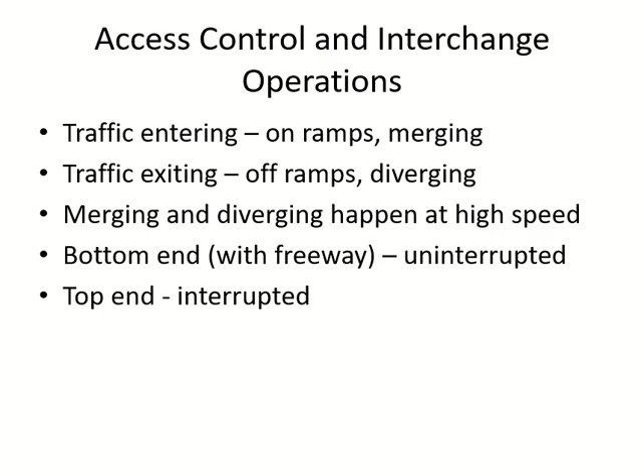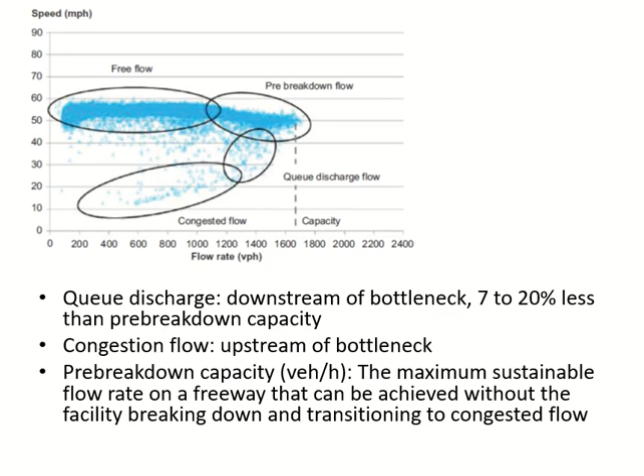Okay, we discussed the ramps and the traffic movement on the ramps, and what are the different types of traffic flows which happen on these facilities without intersections. So there are two main uninterrupted flow facilities. There's a third one as well, which we will discuss in the traffic engineering course, but in this course we are talking about the two main uninterrupted flow facilities, which are freeways and multi-lane highways.

What is a freeway? Freeway has multiple lanes, it has a median, and it is without intersections. Freeway has multiple lanes with a median, without intersections. That is called a freeway.

Because it is without intersections, we use a terminology for highways which are without intersections, which is full control of access. Access means entry to the highway. So when there is no intersection, the entry to the highway is controlled, meaning restricted. Control here means restricted.

The other uninterrupted flow facility is multi-lane highway. This one also has multiple lanes in each direction. It may or may not have a median, and it may or may not have intersections as well. This one has intersections, but the spacing between the intersections is more than 2 miles. So multi-lane highway has multiple lanes in each direction, and it may or may not have a median.

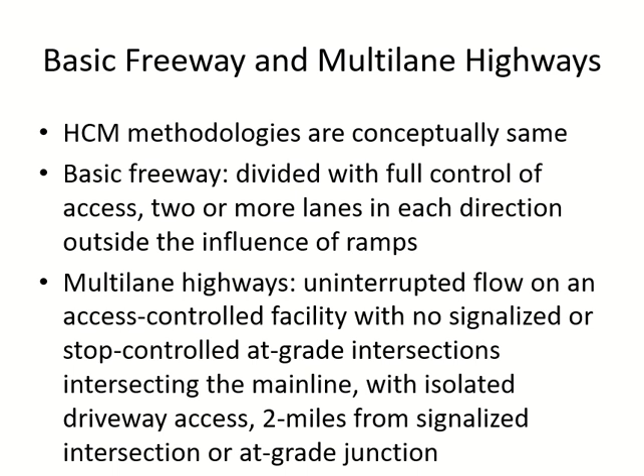Let us start with some definitions. The first definition is for capacity. We have used this term earlier as well, but here we are using the definition given by Highway Capacity Manual. So in this analysis, we are following the procedure given in Highway Capacity Manual, which gives you the procedure to calculate capacity and other things for uninterrupted and interrupted flow facilities. According to Highway Capacity Manual, the official definition of capacity is what you see on the screen.

It's a maximum sustained 15-minute flow rate. Remember, flow rate we discussed earlier - when you take flow and convert it to 1 hour, that is flow rate. So it is 15 minutes but converted to 1 hour, that's why they are calling it sustained flow rate. And it is expressed in passenger cars per hour per lane.

The capacity is defined for a uniform segment. Uniform means the part of the highway for which you are defining the capacity - within this part, the highway design is not changing. So if you define the capacity from point A to point B, then between point A and B, nothing changes in the design of the highway - number of lanes, gradient, median, shoulder, lane width, nothing changes, it remains the same. When this happens, we call it the uniform freeway segment or uniform highway segment.

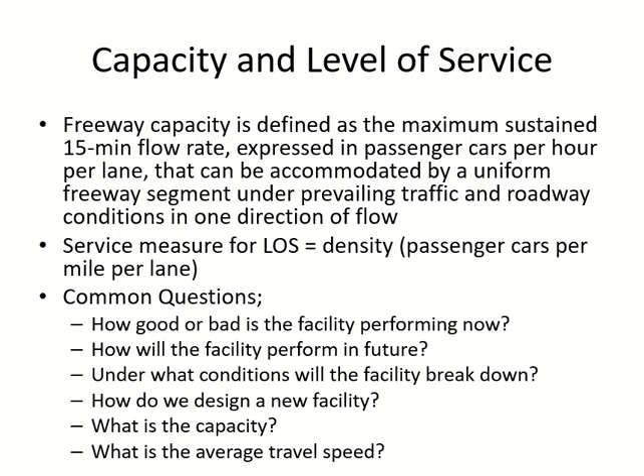So how do you know when it will break down? You should know the capacity. When you go beyond the capacity, the facility will break down. So capacity is important, and for the new facility you will decide the capacity. The most important parameter for the traffic engineer as well as the driver is the average travel speed on the highway. These are some of the basic questions we try to answer through our analysis, and you will see it being done in this chapter.

Why is it unstable? Because at E you are at capacity, so you don't have any extra spacing. If you want to change lanes, the flow will become unstable because of you—other vehicles will stop to give you the chance to change lanes. Or if you have a problem with your car and stop, everybody has to stop behind you because they don't have any space to go to the other lane. That's why the E stage is unstable, but E basically means capacity.

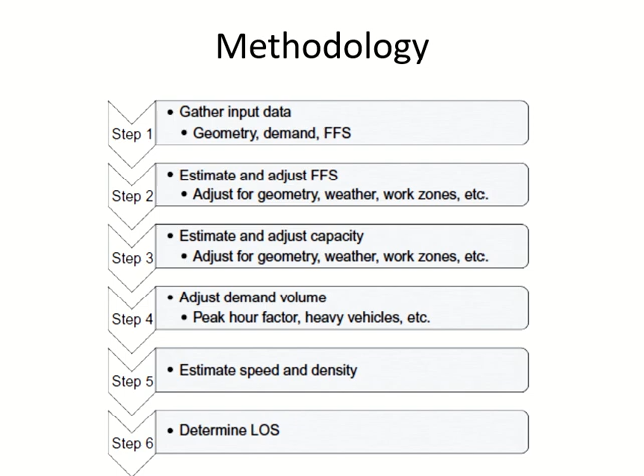So whatever you are doing starts from step 1 onwards. For example, if you are doing it on your own, you have to find out the field conditions and the field data. You should gather data about lane width, shoulder width, number of lanes, and other things shown in this table, which gives the ideal values of these parameters.

So we talked about lane width. What is the ideal value of lane width? 12 feet. Lateral clearance: on the right hand side, the ideal lateral clearance is 6 feet. What is lateral clearance? The distance between the lane and any roadside object. The roadside object could be a wall, a guardrail, a pole, anything - any physical object on the side of the road.

So on the right hand side, the distance between the lane and the roadside object is 6 feet as the ideal. It could be more, it could be less, but the ideal is 6 feet. On the median side, which is the left hand side, it is 2 feet.

Now keep one thing in mind: when we say lateral clearance, we are measuring from the lane. So after the lane, you may have a shoulder, and the shoulder is part of lateral clearance. So shoulder is 3 feet, and after that you have a guardrail, so your lateral clearance is 3 feet. If your shoulder is 3 feet, then you have some empty space, then a guardrail, so your lateral clearance will be shoulder plus empty space.

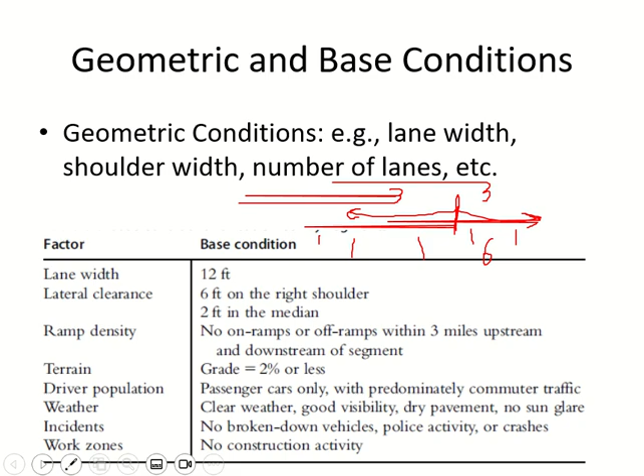One of the very important parameters for the analysis is free flow speed. We know free flow condition means very low traffic, right? So the best way to find out free flow speed is through observation - you go to the highway and actually take speed samples to get the free flow speed. You go to the highway in low flow conditions when the flow is very low, take samples, and do the mean, and this will give you the free flow speed. This is the best way to do it.

Any one of you remember what is the difference between freeways and multi-lane highways? I just told you today. What is the difference between freeways and multi-lane highways? Anybody? No one? Okay, I can move forward, no problem.

If you are going to measure the free flow speed on the highway itself, the flow should be less than 1000 passenger cars per hour per lane. This is if you don't want to use the equations, but if you use the equations, let's see the parameters. We need the base free flow speed. For freeways, the base free flow speed is 75.4 miles per hour - it is considered the highest for the design. That is 75.4 for the freeways. For multi-lane highways, it can change.

Then we have the factor for lane width. In both equations you can see these two things: base free flow speed and the factor for lane width. There's a table which gives this factor - it gives you FLW, which you can use in any of these equations.

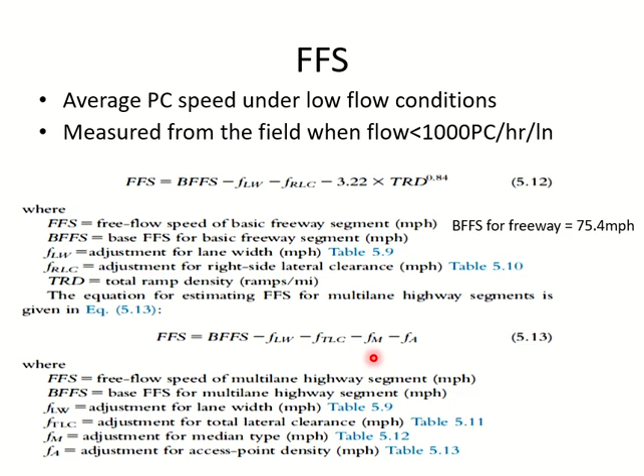One is for median type, the other is for access point density. Median types are 3: undivided, two-way left turn lane, and divided. Undivided means without median, divided means with median. And what is the two-way left turn lane?

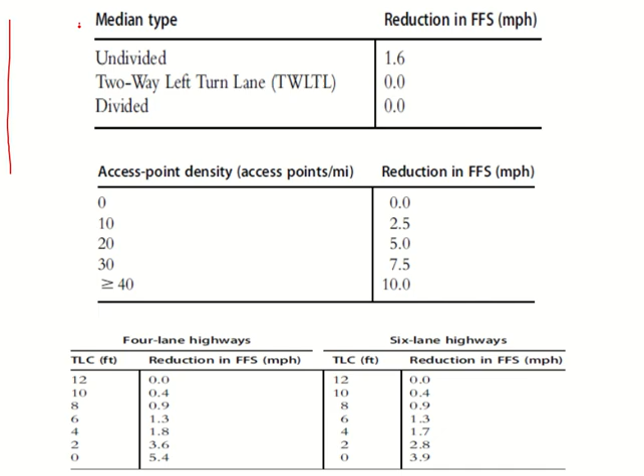Let me try to make it here. So you have a highway. In the middle of the highway, you have a lane. Maybe there are 2 lanes here and 2 lanes on the other side, and there is an extra third lane. So you have total 5 lanes in this case. In this example, 5 lanes, but you can imagine it can be 3 lanes in each direction and 1 extra lane - a two-way left turn lane in the middle.

That extra lane is for left turning. So let's say there is a turning here. If I want to take the turn, I'll come in this lane and wait. I will wait as long as this side is free. When this side is free, I will take the turn. And the guy from the other direction can do the same - he can also wait here till this side is free, and when free, he will take the turn. So this is called the two-way left turn lane.

For left turning vehicles who can come from any direction, they will wait for their turn to make the left turn without disturbing the traffic. So this is the function of the two-way left turn lane, and you can see the factor for two-way left turn lane is same as divided, because this is dividing the two directions as well - the people going straight will not go in this left turn lane.

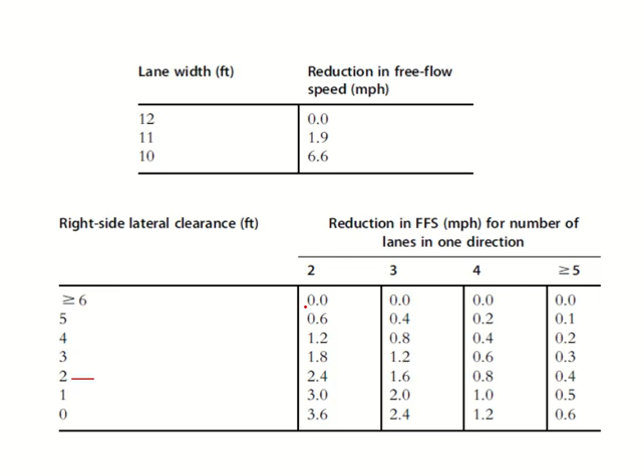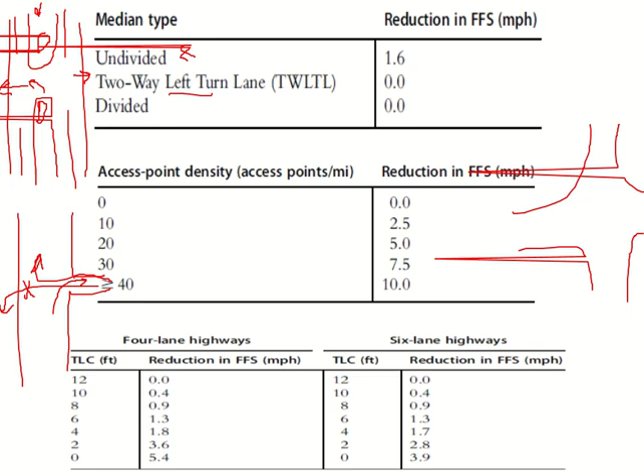Then factor for lateral clearance, our lateral clearance is 2 feet only, and we have 4 lane freeway, so 2 lanes in each direction - 2 feet clearance and 2 lanes each direction gives 2.4. And TRD is not given directly - you have 16 ramps in 6 miles, so TRD will be 16 over 6. So how much is the free flow speed?

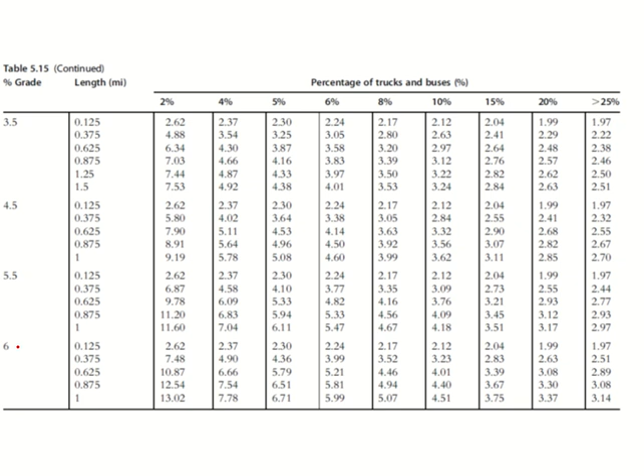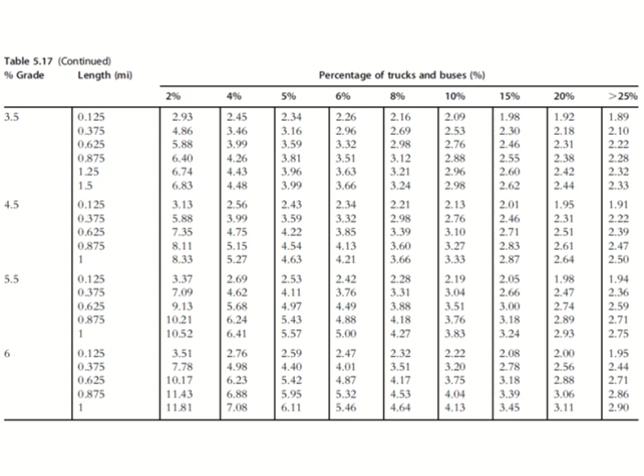Now, this is the continuation of the same table. This is up to 2.5%, then after 2.5%, this is the part. This is another table for grade, and it also has two parts, and this is another table for grade, also has two parts. So you will see 6 slides, and these 6 slides have 3 tables in them. All of them are for the same condition, grade. What is the difference between them? You can see the difference at the top here.

Heavy vehicles are divided into two types, SUT and TT. SUT means single unit trucks, and TT means trailer trucks. Single unit trucks are small trucks, the 6-wheelers we see. The ones on which you get furniture from, not Extra, from what, IKEA or something.

Those trucks, which normally take deliveries for stores and so on, are called single unit trucks. And then you may have seen bigger trucks in the port area or near the causeway, very big trucks. They have trailers in them, and sometimes they are bringing cars, sometimes they are bringing steel and so on and so forth. So those big trucks are called trailer trucks.

So if the small trucks are 30% and the big trucks are 70%, you will use this table. If both of them are in equal amount, 50-50, you will use this table. And if small ones are 70% and the big ones are 30%, you will use this table. So for grade, we have 3 tables depending upon the percentage of heavy vehicles within them. So this is 30 and 70 within the heavy vehicles. The heavy vehicles may be 6%, so within that 6%, what is the distribution of single unit and trailer trucks?

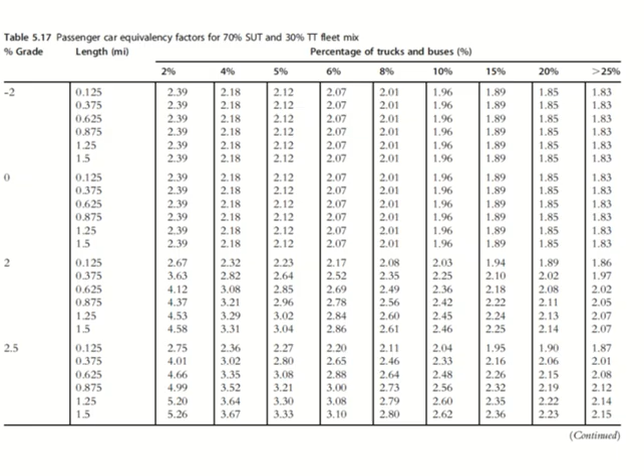So let us do one very quick small example. We have directional volume 3100, so this is my V, normally in vehicles per hour. Then we have to find out the flow rate in passenger cars per hour per lane. It's a 6-lane freeway, so the number of lanes in one direction is 3.

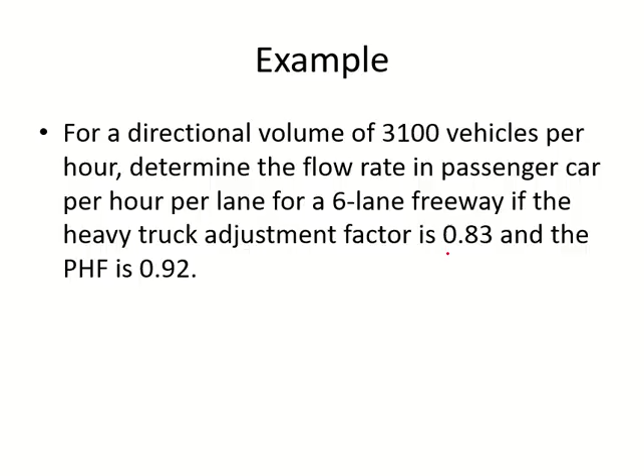Peak hour factor is 0.92 and the heavy vehicle adjustment factor is given, we don't have to calculate, they already did it for us. So FHV is 0.83 and peak hour factor is 0.92. So my VP will be 3100 divided by all these things. So how much is that?

Yes, how much is Vp? Yes, how much is this?

Okay, so this is in passenger cars per hour per lane, and this is flow rate now. So this will not be called volume, it will be called flow rate.

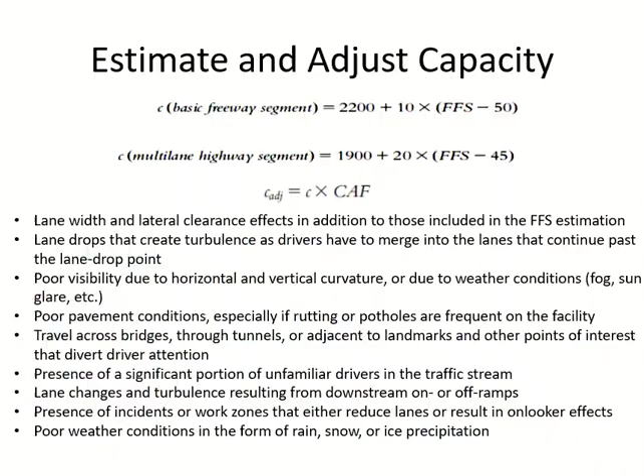And then once you have found the speed from here, the density will be calculated as flow rate upon speed. So either the speed is the first one or the second one. So you find out density, and if you know the density, you already have the ranges of density for level of service, these ones.

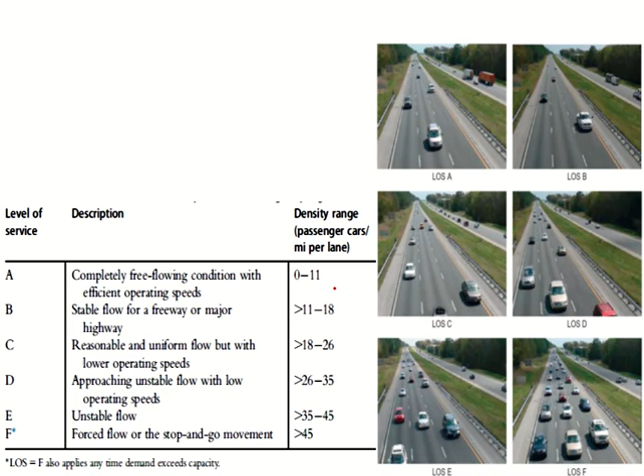Okay, so you find out free flow speed, then you find out VP, then you find out breakpoint, compare, and I already showed you the equation for capacity as well. Then you will see the condition. Based on condition, you will calculate the speed, then the density, then you go back to the table of level of service. It will give you this density belongs to which level of service. So this is the whole procedure.

Okay, but let's say your free flow speed is 60. So how to use the curve?

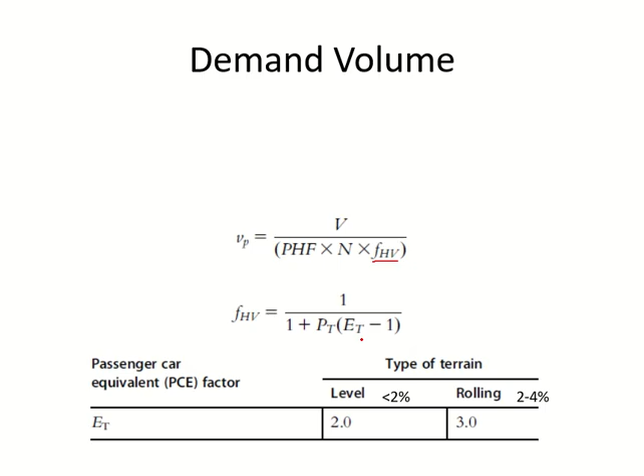If I go to the equation of Vp, I need the FHV, so I need percentage of trucks and the equivalency factor for the trucks. Percentage of trucks is given, 6% trucks, then for the gradient 2.5% gradient, 1.25 mile length, and 30-70 distribution of small trucks and big trucks, single unit trucks and trailer trucks. So FHV will be 1 divided by 1 plus 6% trucks.

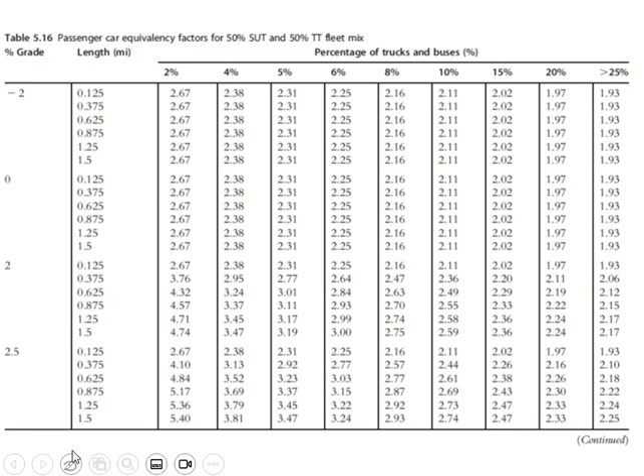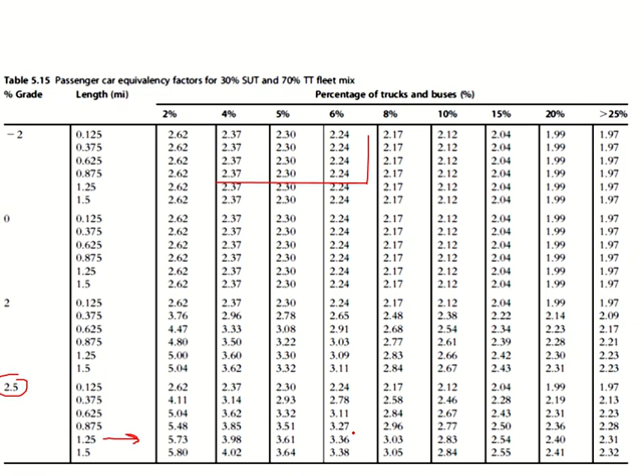Now I need the equivalency factor. 30% single unit and 70% big one, so this one. The gradient is 2.5%, so I'm here. The length was 1.25 mile. So 6% trucks is here, 1.25 is here, so my factor is 3.36. So 3.36 minus 1, this will give me the FHV factor.

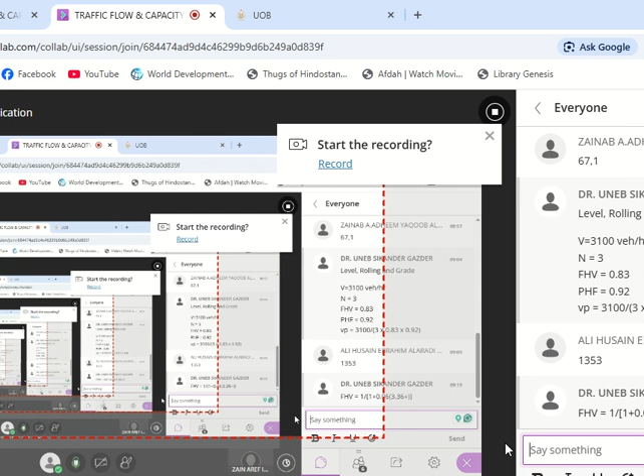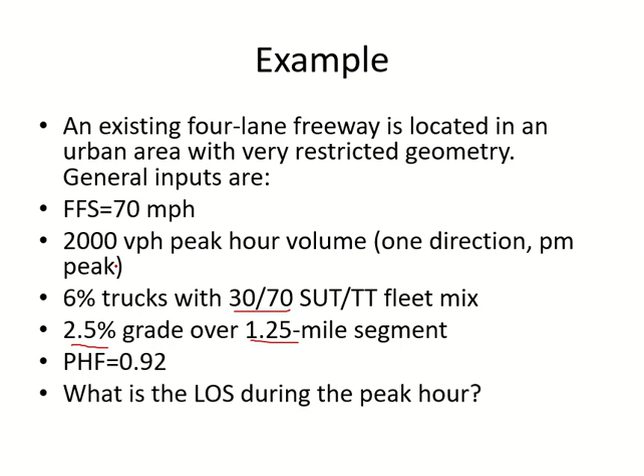Then after you find out FHV, your Vp will be the volume, which is 2000 here, divided by peak hour factor 0.92, number of lanes in one direction. So 4 lane means 2 lanes in one direction, multiply by the FHV factor. This will give you the Vp.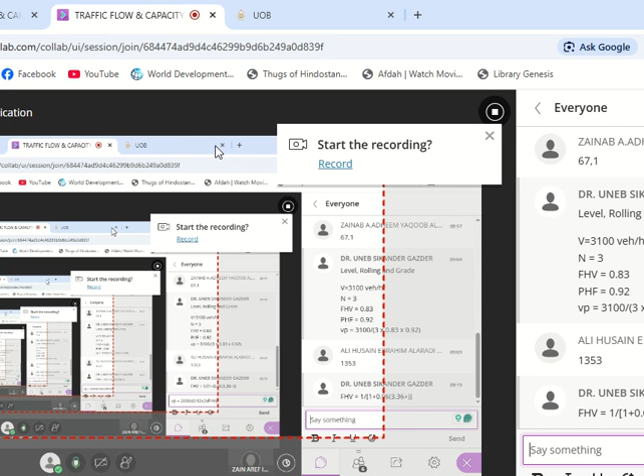After Vp, now you can directly use the graph. So if you tell me the Vp, then we can proceed to the graph. For the rest I will do the manual attendance, so don't worry. So what is the value of Vp here?

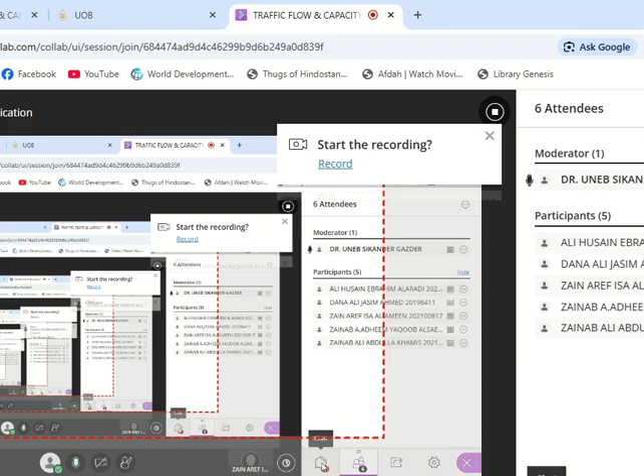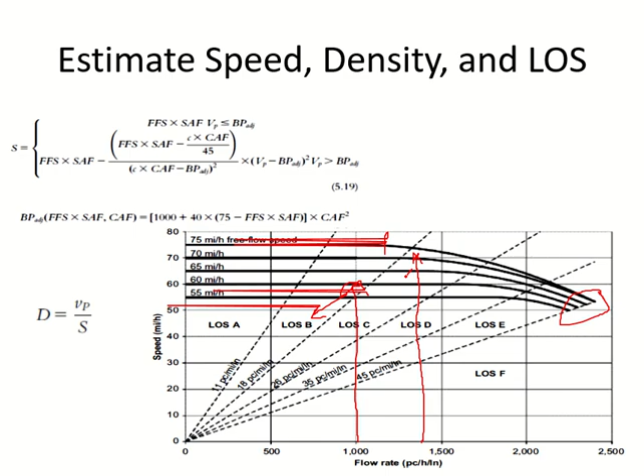So if I go to the graph, I have 70 miles per hour, so this one, and 1300 something is somewhere here, I cannot be precise, it's somewhere here. So I'm here, so my level of service is C.

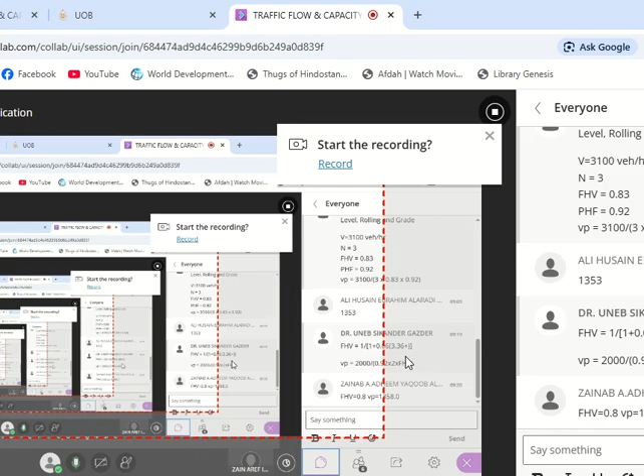So in this case I can directly use the graph because my free flow speed matches with the curve which is given. And again I explained to you the full procedure, and I already told you that in traffic course you will take it in more detail. So we are just using the direct process here, because so that we can move on to the new topics of this course, the specific ones for this course. Any questions, any problems?